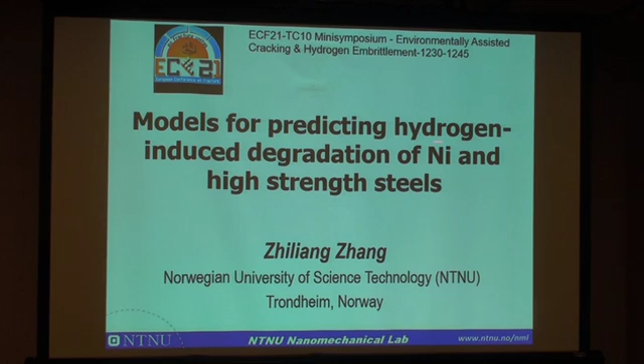I'm from Norwegian University of Science and Technology, Trondheim. I will talk about nickel as well, not only high-strength steels. Here is the overview of my talk. First, I will give the background of my talk. And I will talk about the HIPP project, which I'm leading in Trondheim, and some of the results. And also, I will summarize the challenges.

I would also like to give you a short introduction of the background of our research. We have been working on fracture mechanics and the degradation of materials for many, many years. We're still working on these classical topics like modeling ductile fracture, crack-tip constraints, and residual stress effects, pre-strain effects, mismatch effects, etc. Recently, we have moved to Arctic materials because Arctic technology is very important for Norway. And we are concerned with hydrogen embrittlement, ductile to brittle transition.

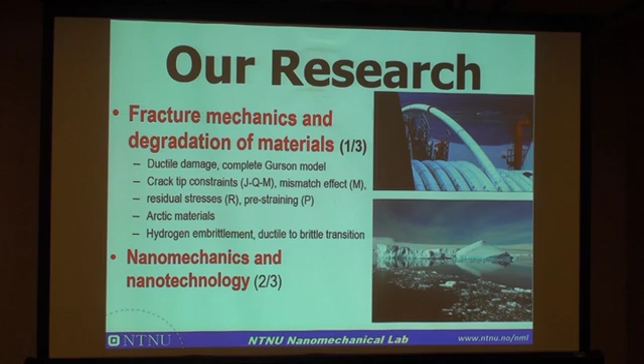In the beginning of this millennium, several major accidents happened in Norway for the offshore pipelines due to hydrogen-induced stress cracking. The scale of these accidents was so huge that the industry wanted to start the investigation immediately. So we have started several testing projects, HISC-1, HISC-2, 3, 4, in the last 11 years, from 2002 to 2013. The aim of the project was to establish practical limits for the use of supermartensitic and duplex stainless steels to be implemented in design procedure through testing.

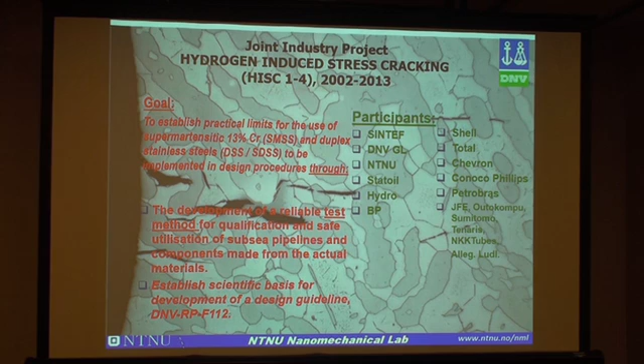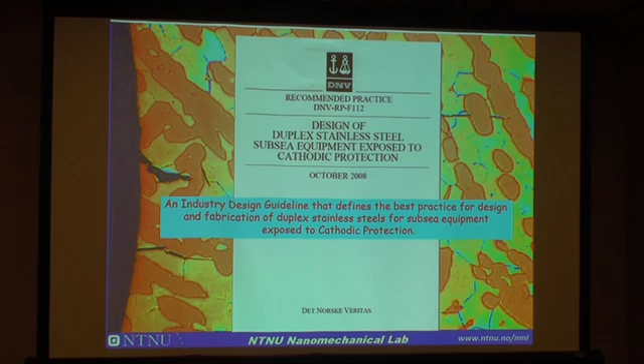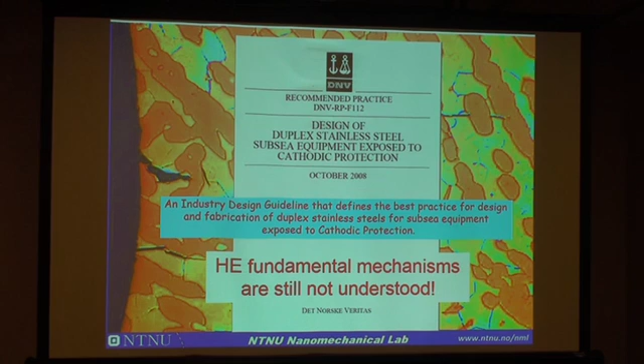We have tested a lot. And you see the major oil companies were involved. The result of this testing was the design guidelines proposed by DNV. However, after these testings, we realized that for hydrogen embrittlement, the fundamental mechanisms are still not understood. We cannot only do testing. So we really have to get some fundamental understanding of the hydrogen embrittlement.

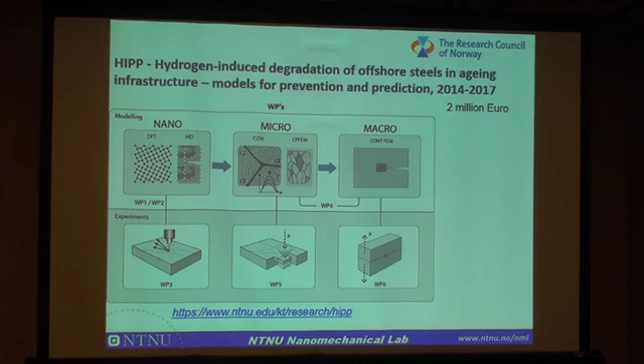And the Research Council heard our crying for fundamental research. So I and my team submitted a proposal to the Research Council of Norway. And we were fortunate to be funded a research project. The title is Hydrogen-Induced Degradation of Offshore Steels in Aging Infrastructure, Models for Prevention and Prediction. The main purpose was to develop a model framework which couples and describes the hydrogen degradation mechanism at different length scales towards a mechanism-based integrity assessment program. Here are my project team, and the main focus of this project is grain boundary.

You have seen the pictures presented by my student Kai Zhao, and we are doing both multi-scale simulations and multi-scale experiments. What's special is that we are going to verify these models at different levels. So we have started from nano, micro to macro, and we have an already existing large database. And in addition to the database, we are also doing atomic scale verification and nanoscale verification.

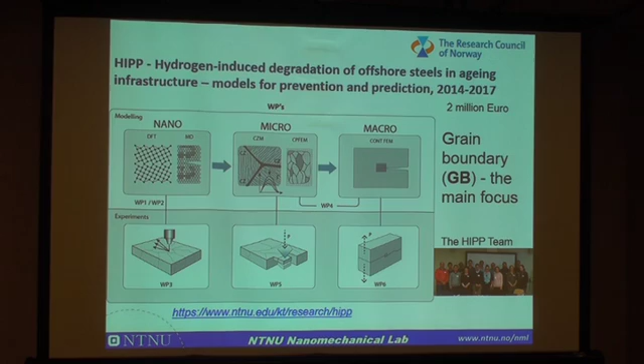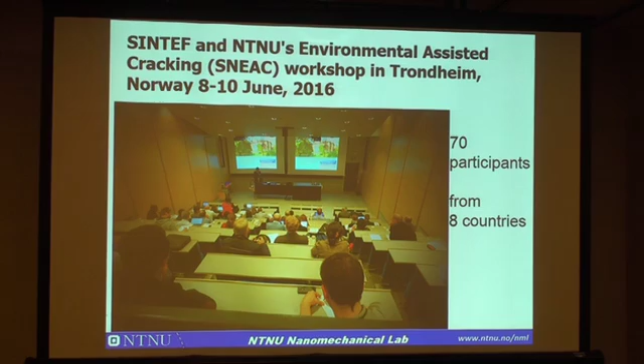So in this HEAP project, we are doing atomic probing on the effect of grain boundary. And here are some examples. We have started with the decohesion mechanism, hydrogen enhanced decohesion mechanism. Put the grain boundary between the two crystals, and use DFT calculations to calculate the energy before and after the fracture.

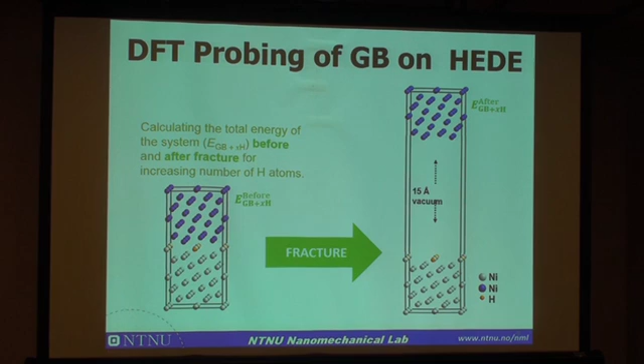Here are some typical results. Some of you may already have seen. Here is the fracture energy, and it seems grain boundary has a strong influence on the fracture energy. If we look at the circle here, the sigma 3 grain boundary has a little effect, but sigma 5 has dramatic effect. This shows that DFT is a very powerful tool to probe the effect of grain boundary.

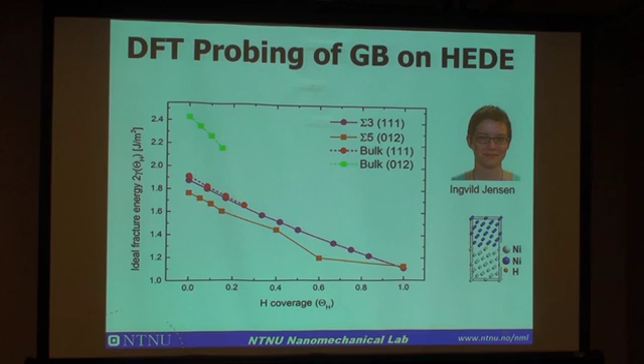This is nickel. And in addition to the DFT, we have nanomechanical probing of the grain boundary effect. Afrooz and his students are heavily involved with nanomechanical probing. So we can use EBSD to identify the grain boundary of interest, then use nanomachining, let's say FIB, focused ion beam, to cut the specimen with the intended grain boundary, use in situ charging, put this whole specimen into the nanoindenter to compare with and without grain boundary, and then use the numerical models to understand the effect of grain boundary.

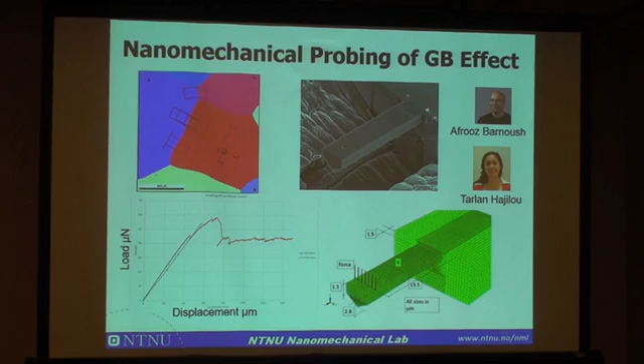You have seen results from my student Kai Zhao. He has used molecular dynamics to probe the effect of grain boundary. Here maybe it's not so easy to see. Vertically is the KID, the K1 stress intensity factor for dislocation emission, as a function of hydrogen numbers. These hydrogen numbers can be easily converted to the hydrogen concentration. Here we can compare the single crystal and the bicrystal.

What he found is that the hydrogen concentration will strongly influence the K1D, and in addition he has developed a continuum model which can capture the duality of the hydrogen and the grain boundary effect. These are very exciting results, and we're going to refine these results very soon.

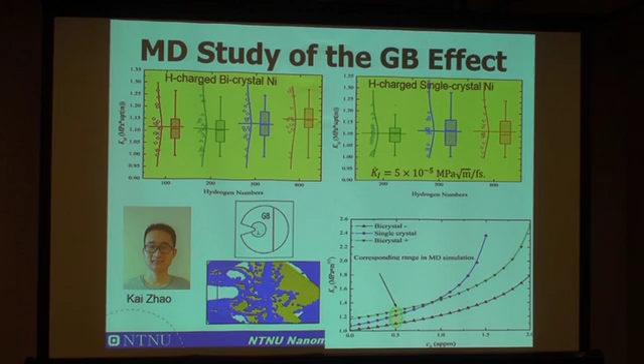Finally, I would like to introduce some new results on the hydrogen embrittlement simulation of high-strength steels. Now it's quite a common practice to simulate the hydrogen-enhanced decohesion by cohesive zone model. Here the vertical axis is the traction, that's the stress, and horizontal is the separation, the distance. This traction separation law is influenced by hydrogen. In the beginning, we have virgin material. If you have more hydrogen, this law will be decreased. And we can easily implement this cohesive zone together with hydrogen diffusion into a finite element model.

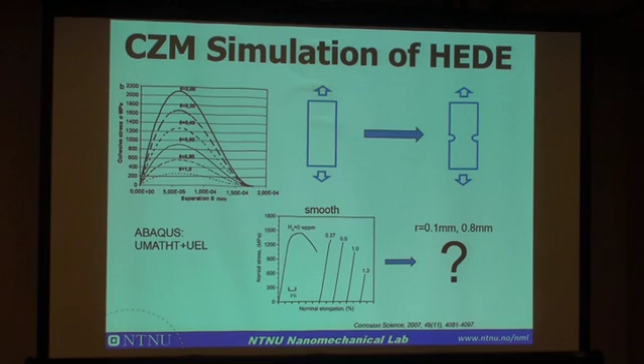The question we have been asking ourselves is, is it possible to transfer the hydrogen degradation effect from one specimen to another one? We know the hydrogen effect is dependent on the geometry. Hydrogen will have different influence. But is it possible to transfer from one specimen to another one? For example, we have hydrogen embrittlement test results for smooth specimens. Is it possible to transfer to notched ones? Otherwise we have to make a lot of experiments for the notched specimens. So this is a central question.

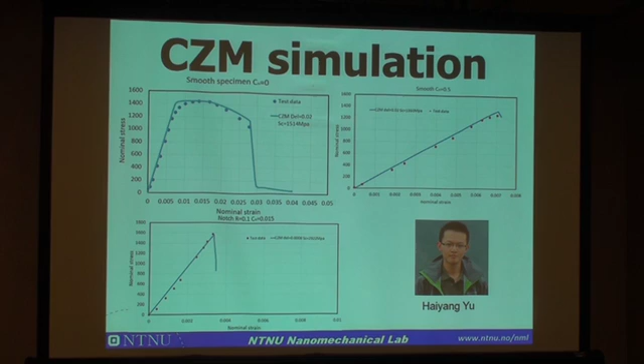My student, Haiyang Yu, has presented just another topic. He focused on this work as well. He used the cohesive zone model to fit all these test results for the smooth specimen, CH without hydrogen, and CH 0.5. These are the global hydrogen. And he fit these experimental results for both the notched one and the smooth one. And he plotted the critical cohesive zone stress with the local lattice hydrogen.

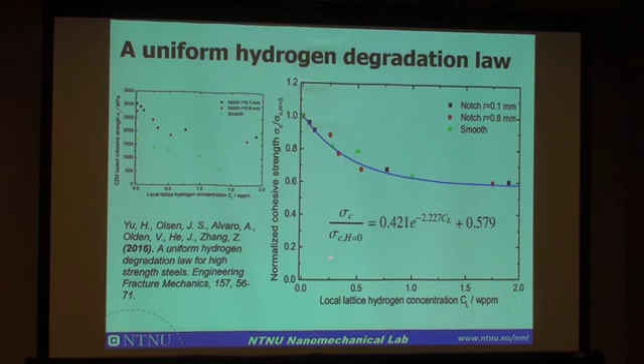So the critical cohesive stress is a function of, of course, the critical separation distance, which we have kept as a constant, and also eta, the stress triaxiality. And with hydrogen it can be expressed as a relation without hydrogen, moving everything into the D, and D is this relation. This is an empirical relation.

So with this figure, I would like to conclude my talk, or point out some challenges. We have models working at different scales, especially the uniform hydrogen degradation model for high-strength steels, which seems promising, of course with limitations. There are a lot of limitations. However, for the microstructure-informed predictive model, which was the aim of this HIP project, there's still a long way to go. We're still not there yet. If anybody has any ideas how to realize these predictive models, I would very much like to cooperate with you.